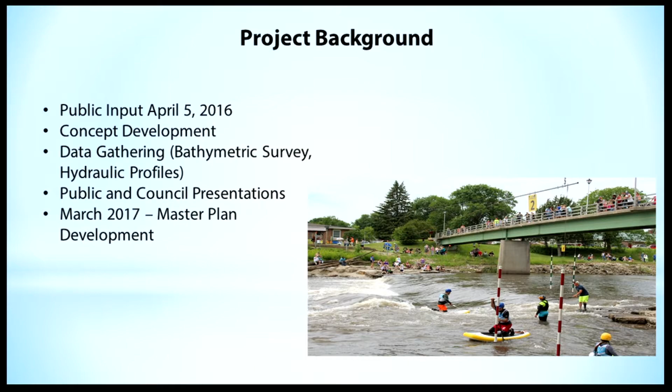Starting with project background, we began this project back in the winter or spring of 2016, starting with a public input meeting in April. That idea was gathering comments from the public. We took those comments and came back to City Council for another public meeting down at the Community Center in June of 2016, followed by a council presentation in July of 2016. We worked out some of those ideas and came back to council about a year ago to develop a master plan for that river corridor.

In the meantime, we had some data gathering. The consultant looked at some bathymetric surveys, which survey the riverbed through this corridor from Center Street down to West First Street. They did some profiling and looked at some hydraulics and river flows through that area.

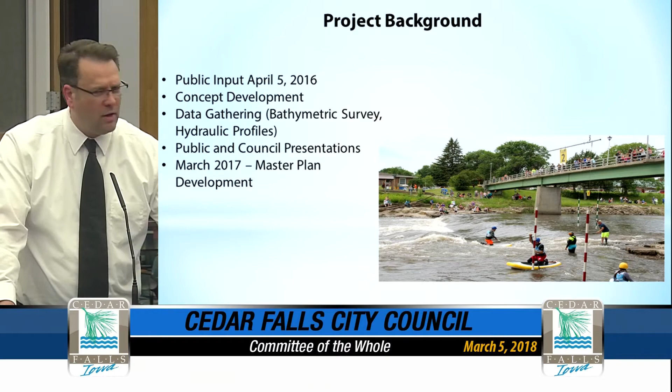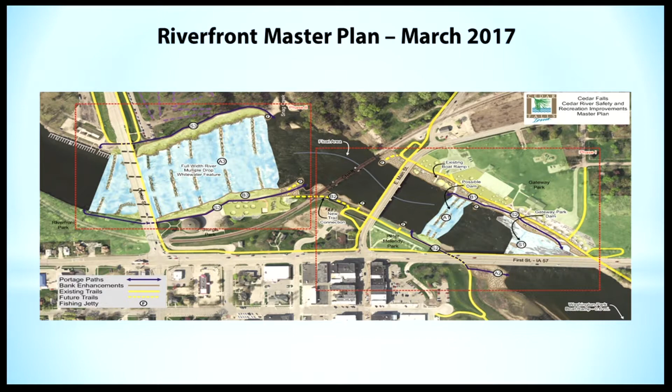So again, in March of 2017, we came back to the council for the master plan development idea. The master plan, shown in the drawing here, has an upstream phase from basically the beach house down to the river or railroad bridge, and a downstream phase from roughly the upstream side of the Main Street Bridge to the downstream side of the West First Street Bridge. In that phase, we focused on a couple of projects or concepts on the riverbank and in-river activities.

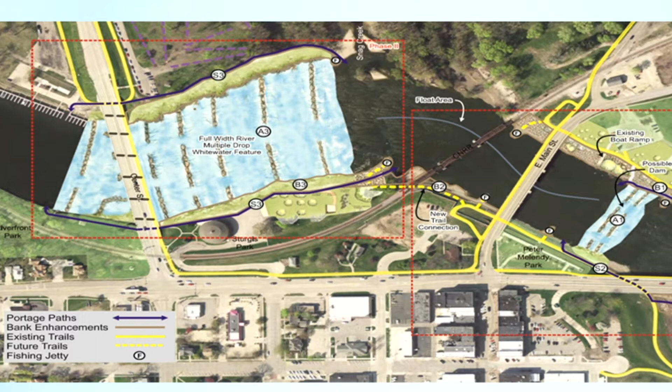So with that, I want to move this to Shane with Riverwise, and he's going to go over some of those ideas and what they've developed. We entered into a contract with them last September, so they've been working on this project since then. They're here to give a little update and preview. Thank you, David.

First of all, David, thank you. Appreciate the introduction, and thank you to city staff. We're really excited to be here tonight, very honored to be part of this project. There's been a lot of excitement around this type of recreational project in your community, and we're honored to be presenting this to you guys tonight.

What we'd like to start with is our objectives and goals for this type of project. First, we're trying to reintegrate your river corridor into your community. We're trying to take this resource, which is commonly considered something dangerous, a problem, something that floods and destroys property, and turn it into an amenity for you guys.

Our main goal is to implement your vision, the vision you provided in the master plan that David just talked about. We also want to create a project that doesn't increase flooding potential. We realize flooding is a big issue here, and we know you've just gone through your levee project, so we're really sensitive to that.

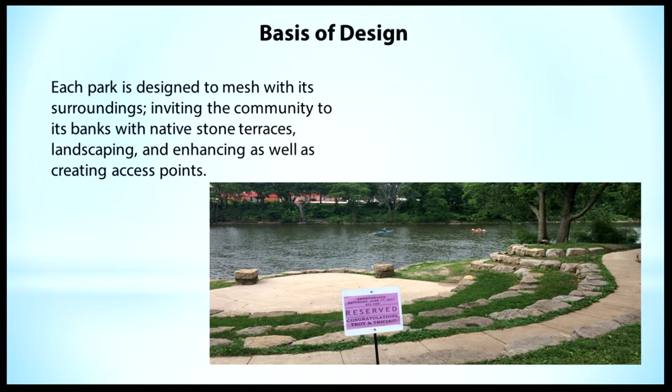Okay, the basis of our design, each park that we try to do is designed to mesh with the surroundings. So we're trying to invite people to the banks. We try to create native stone terraces that look really similar to what you naturally find on the banks of rivers. We try to create landscaping, and we try to enhance as well as create access points. Once again, let's bring people down to the river and use this amenity.

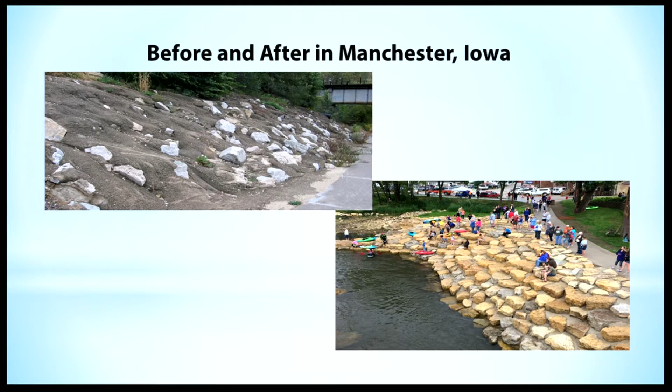One of the key things you'll notice in that bottom right picture is, well, we're not seeing the whole river there, but there's a few kayaks there. And there's a lot of people there. So one thing that's key is some people go, well, you're building these parks for kayakers. The reality, which we're going to get into a little later, is that these parks are for communities, and kayakers are just a small piece of the users that we see.

Get rid of all that stuff, pull it out, put in some natural terracing, try to integrate those outlets into the banks, and once again, take an area that's basically full of blight and create an amenity for you.

Multiple user groups. So I'm going to get into this a little more later, but one thing we really want to drive home is that these are not just parks for kayakers. Kayakers, I kind of say, are the monkeys, or they're the show that's out there sometimes. But the reality is these parks are commonly used and often used by fishermen.

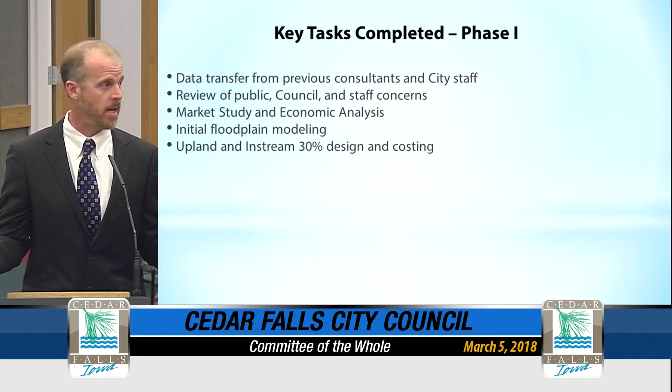That being said, we understand that no-rise is a condition that we have to have on this project. Alongside that, we did upland and in-stream 30% design and costing, which we're going to present to you guys tonight and walk you through also. So those are the key tasks that we went through.

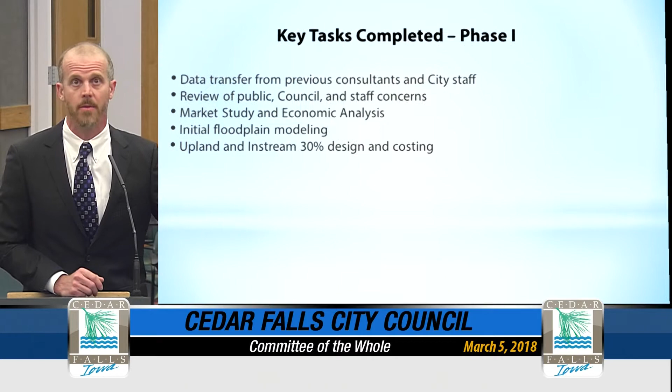So I always want to dispel the myth that, oh, you're trying to build this little park and it's just for kayakers. The reality is that's not the case. We didn't realize this till about 5 years ago when there was a study done by a lady out of the University of California, Berkeley for her PhD, where she basically came to parks around the country and sat there and watched and took notes and collected surveys from the visitors, and she came up with this number for us.

And we had been designing them with the idea that we needed to have banks and bank improvements as a big part of it, but it really drove it home finally when we got these studies. So something we want to convey to you guys and make sure everybody understands.

Next, I'm going to talk a little bit about the economic study that was done by RPI. Once again, feel free to interrupt as needed. They completed a study. It's about 50 pages. Basically, what they did was they collected data from local sources and national sources, statistics for use, different types of use, number of people, census data, to get a feel for the number of people, the kinds of people, and who's going to come out there and what they're going to spend.

We're going to summarize some of those numbers for you today. If we need to get a little deeper into that, we'd be happy to answer questions and/or can potentially follow up with you later. Specifically, there's about 3.8 million people within a 3-hour drive of Cedar Falls. Similar whitewater parks around the country, they found, attract somewhere between 23,500 and about 47,000 annual uses.

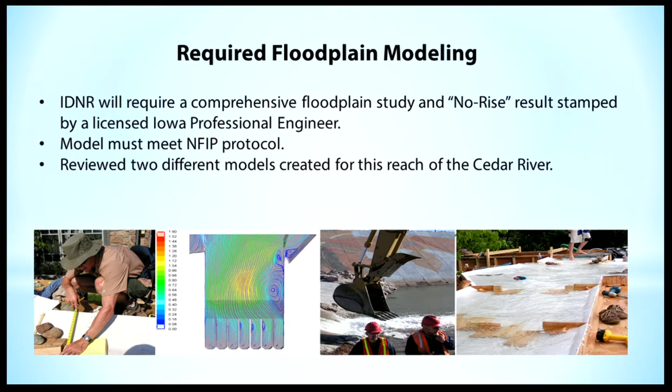To get through the first stages, we reviewed two different models created for this reach of the Cedar River. One was created by AECOM, who is doing your levee project, so we got the model from them. We also got the historic model created by FEMA for the area, and spent a lot of time working through those two models to figure out what we could do.

We had to bring them into contemporary, industry-leading software. We updated them with the current bathymetry collected earlier in the project, making sure we followed these really strict standards that the government requires. We used bridge and levee geometry in the state-of-the-art model to run these routines, and added additional cross-sections based on the bathymetry and where we thought we'd put these structures.

The result is that we've got a model that mimics the existing hydraulic conditions in this reach of the Cedar River. That right there is a big step - just to get to the point where we have a model we believe meets government standards, so we can start testing what we want to do out there.

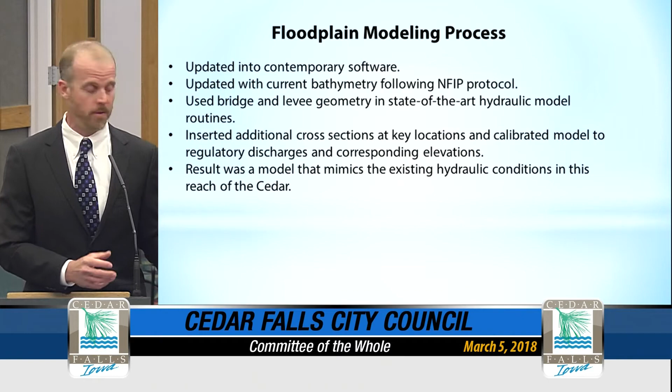So the initial concept - and this is common in rivers - was that if you want to lower the floodplain, you need to open up the river. You need to cut material away and let the water spread out. We started doing that and created an entire design based on that concept: we're going to open up the river, let the river breathe, as it were, a little bit more.

What we found was that didn't work. There's a hydraulic condition, basically from the First Street Bridge, that creates the opposite situation. The First Street Bridge constricts the river during flooding situations and can actually raise the water surface. So what we had to do was switch that. You can see up here, we actually caused a rise of 0.3 feet - we're talking about 4 inches. That's enough, as we all know, to cause a rise.

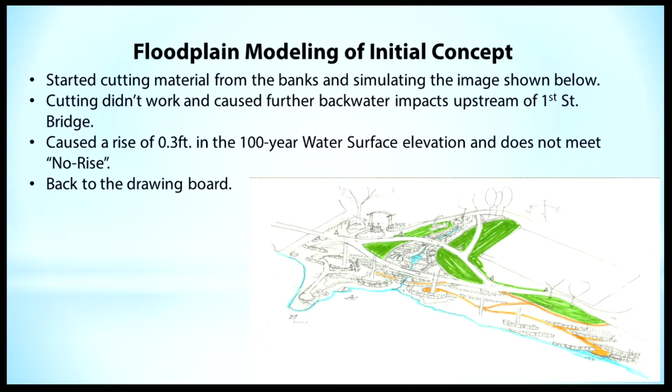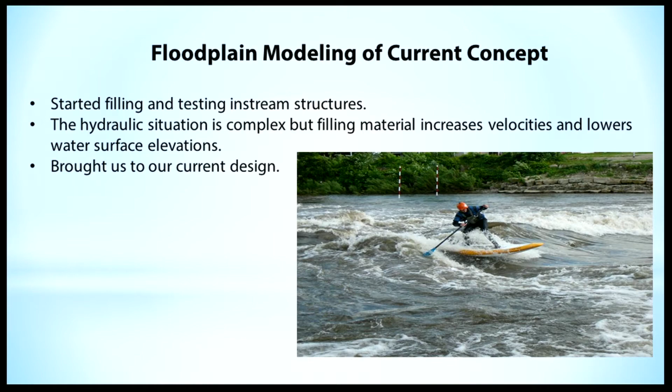It's a non-starter on this project, so we had to go right back to the drawing board and try the opposite - adding some fill material, which constricts the river, speeds up the velocity, and drops the water surface. A little bit of technical engineering design there, but the reality is we went through a whole process we thought was going to work. It didn't, so we came right back to the drawing board, switched our process, and now we think we've got it working right.

This is what you want to flush out at this stage of design, because we're still drawing renderings - we're not deep into the drawings yet, and we haven't submitted permit applications to the government. It's easy to change things at this point, so we feel good that we found this problem before we got too far.

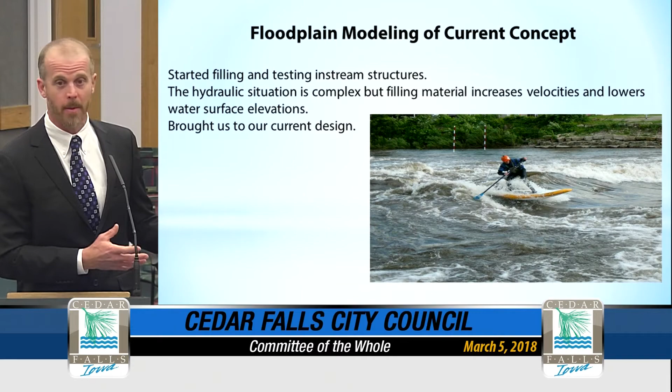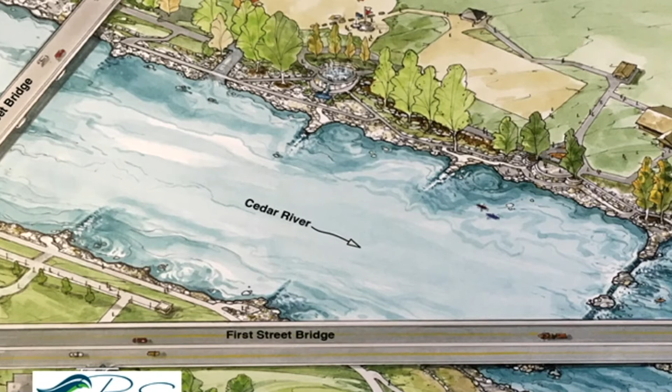We basically have 8 features proposed here. The first one starts up near the Main Street Bridge on the north side of the river. Just downstream of the bridge, you can see some rocks in the river, a small feature with a trail that comes down to it. This is what we call the put-in, or place to start, for those wishing to have an in-river experience. They can come down just downstream of the bridge, pop in right next to that structure, and move on down through the river. There will be 4 different features on that side of the river that they can experience.

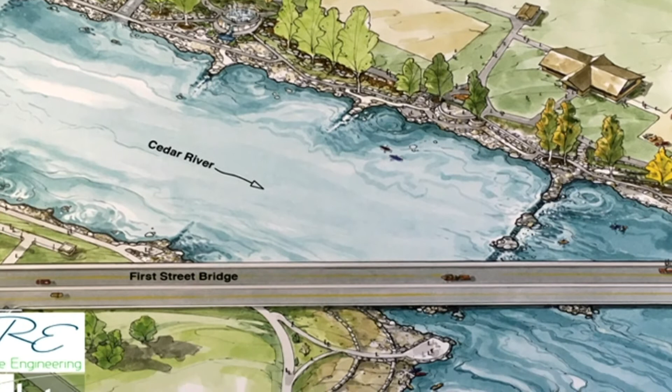We plan to create those features so that they operate at different water discharges. So no matter what the discharge, whether it's super low or medium, people can still come out there and have a recreational experience. At high flows, all of these features will be inundated and basically disappear, and the river will look more or less like you'd see it now at a high flow. On the same hand, there won't be any recreational value there at that point. We also think that's going to help keep people from getting in the river when the water's too high.

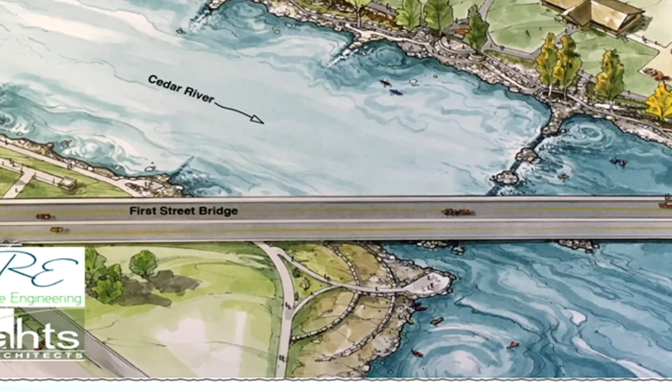On the south side of the river, we have very similar features, just not as many, because it's basically a shorter reach. The idea is that people could come over from the Main Street side, cross over the First Street area, and be able to get into the river and have an experience on the south side of the river too. So we want amenities on both the north side and the south side. The picture is centered now over the 2 different features we show there, and you can see there are trails that come down to both, allowing people to get in and out of the river.

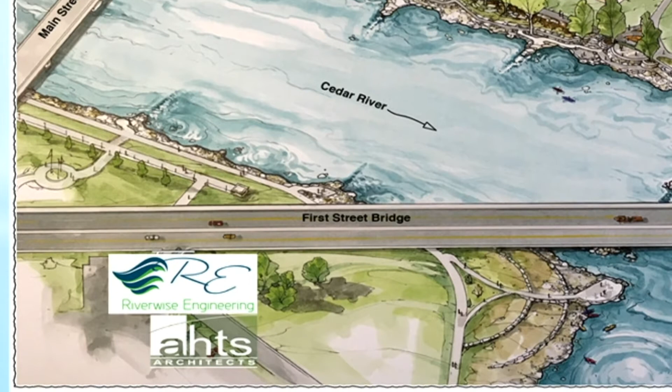Moving down now to the clay hole area on the north side of the First Street Bridge. This is the existing feature that's out there and has kind of been the impetus for this whole project. There's an existing whitewater feature that shows up as a result of the remnants of an old concrete dam, and we want to enhance that, short story.

We believe that's going to be one of the key focal points for people who actually get in the river and want to recreate—the kayakers, the tubers, and whatnot. We believe we can build either 2 or 3 whitewater features there. You can see we've got some little islands that split these features, and the idea is to create differing levels of skill as you move out towards the middle of the river. So the more timid people can stay close to the banks, going through the chute closest to the bank, making it easier for them to get right back out. The more aggressive or more skilled people who can actually paddle a watercraft out there can experience the feature that's more towards the middle of the river. So it's designed to cater to people's different skill levels based on where they are.

Just downstream of the First Street Bridge, we envision one more feature and a nice area for people to exit the river. There's a concrete trail that comes right down to the river, and a big swirling eddy there that will suck people in and help them get out of the river.

Any questions about the in-stream portion before I pass this off to Larry and let him tell you about the bank work?

One question: is everything here real rock, or are you going to do fabricated rock to make these things?

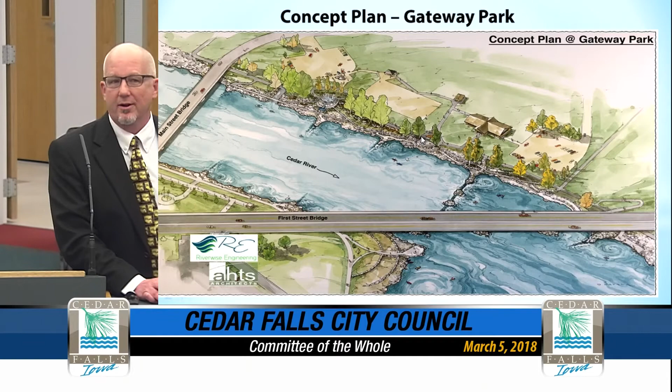So we've got an upper patio that's an overlook. Again, three out of four users are going to be on the shore, so we want to accommodate them and get them a chance to come down to the river. We developed these two patios, one here at the top, and one further upstream, where we have 5% fall walkways that go down to the river, accessing them from both locations.

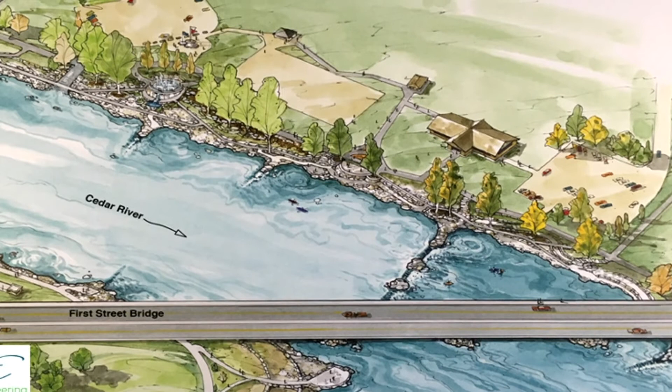Under 5% is handicap accessible, so we don't have to use handrails or formal steps. You'll be able to walk gentle paths down to the river's edge and get to any of the features you want.

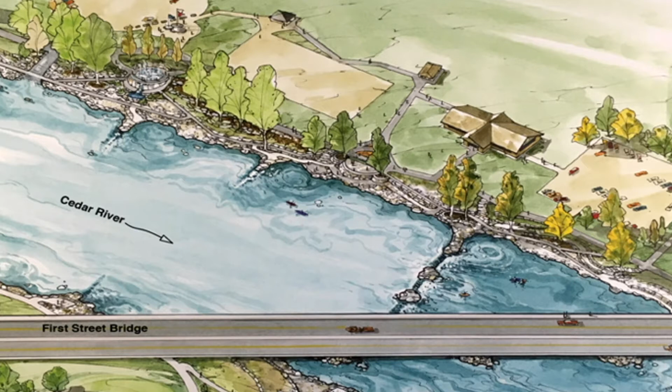We have kind of a high road, low road philosophy. We try to keep a path down at the shoreline consistently so that when tubers come down, they can just run right back up—it's like a sled run in the summer for them. But the ramps are basically for the casual visitor too, and to go to the bathroom.

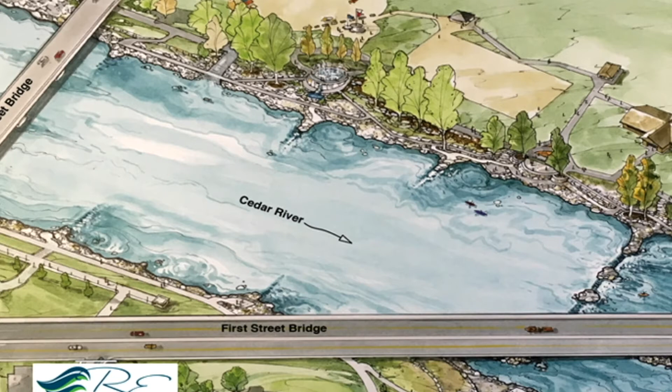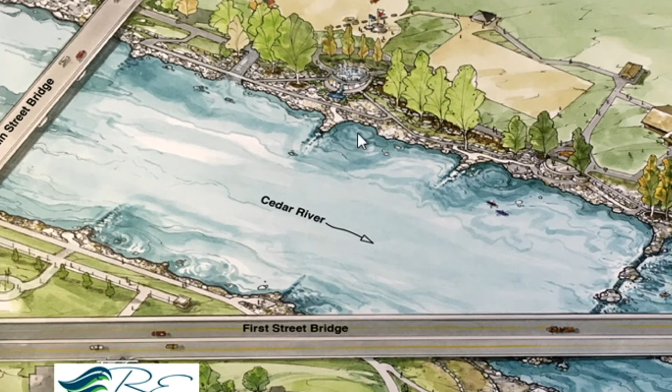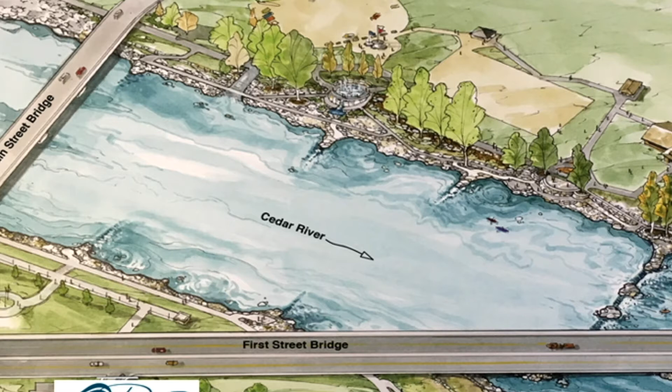Possibly with a splash park, and we do intend to use lighting in the trees. We have that in the budget to light down onto the whitewater features and fountain areas so that we get a little bit of dancing light feature, because the park is very visual and you're going to be seeing it for most of the year. So when it's not summer, we still have light and some things going on that are pretty lively and neat to look at from the other side of the river.

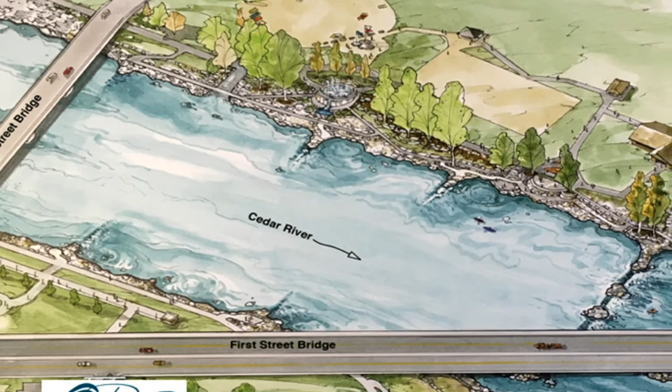We did put in the budget kind of a blank item because we think the park would benefit at the parking lot entry from some kind of an entry feature, since it is Gateway Park. That's kind of where, in our past projects, we've involved an artist or an artist group to create something special there at that entrance. So we left that door open to collaborate with them.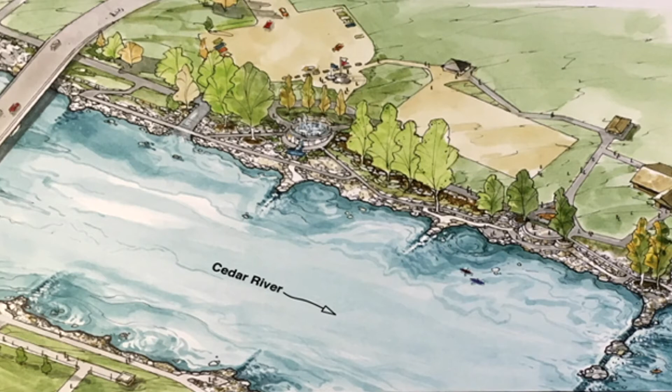We have talked to geologists and started a program where we do some educational signage along the river describing the geology, the hydrology of rivers, and the riparian vegetation. So we do some educational things there, and we've got that in the budget too.

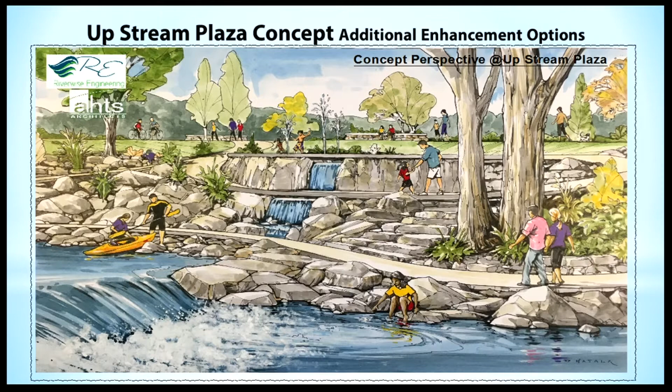I'm just going to move on to the next picture. Our concept for that is something like this at the upstream plaza, where we would incorporate water, an entry point, and use lighting effects on the whitewater to create this dancing light effect. We think it would be a really popular spot.

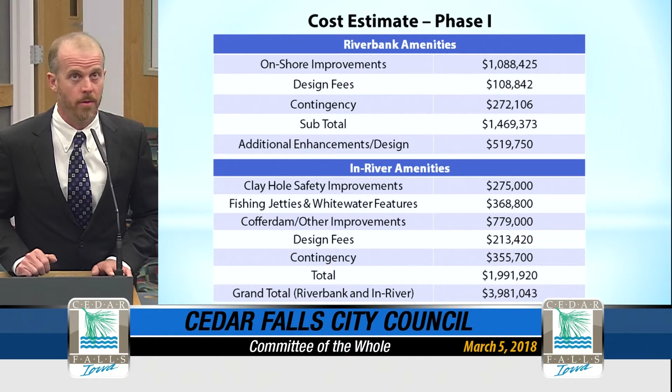Moving down to the in-river amenities—I think Dave was asking about the clay hole safety improvement specifically. We've got $275,000 earmarked just for that area: cleaning it up, getting rid of concrete, and shaping the area to make sure we keep an amenity. Fishing jetties and the whitewater features, $370,000. Coffer dams and other improvements, about $800,000. Design fees, $200,000. Contingency, $355,000, for a total of about $1.9 million. The grand total, adding riverbank amenities and in-river amenities, should be about $3.9 million.

There's our costs—any questions on that? We can come back to this too if we need to. A couple questions actually from the last couple of slides, if that's okay. Sure. On the patio sections here?

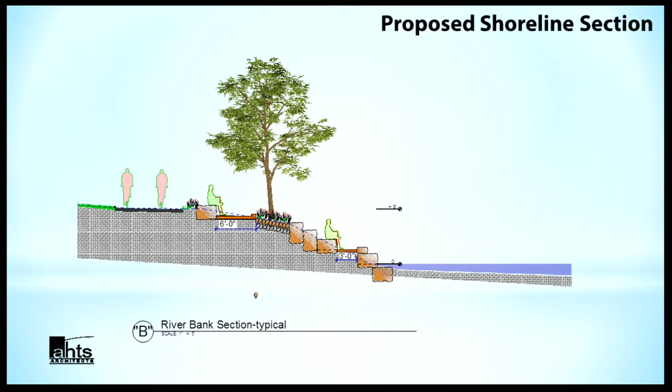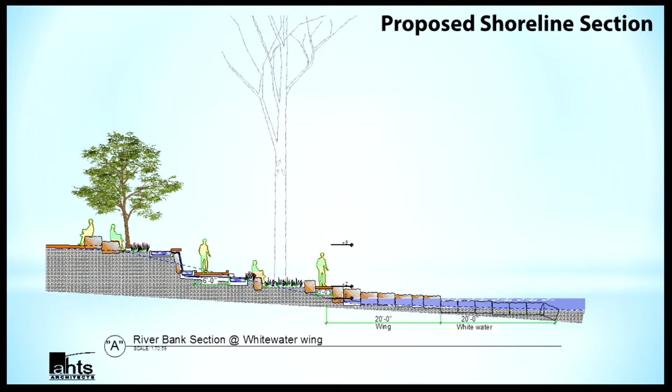Yeah, the patios you mentioned—what are the materials like for those, and how do they fare in the winter? Well, we have concrete patios for the most part. We've got a price in there for concrete patios, but it's a pretty high price so we can do stamped and colored concrete if you like. If it changes to something like a splash pad, that's going to be quite a bit different in outlay of money—there was the $300,000 I think you showed.

So what kind of annual maintenance costs would we be looking at then? Well, it's typically going to be what any other normal concrete paving is. We plan to protect the ends from undermining by flood water, but everything's going to be flooded regularly there. The natural stone really does hold up really well, and it's shown to do so since we did the project in Charles City. So I'd say it holds up really well.

Okay, and then you mentioned some tree removal—do you have any idea how many we'd be talking about? Well, we're going to try to save the big trees that we have there. I don't think we have any trees destined to be removed unless the city desires to do that. Okay, thank you.

On your riverfront master plan as of March 2017, there are 5 drops below the dam—that's not included in this. This is from East Main downstream, correct? Correct. So that's phase 2. We're working on phase 1 right now, which is just that lower area. Okay, so that hasn't been included yet.

Are you going to have an estimate today on phase 2? Do you want to answer that, Dan? Yeah, their contract was just focusing on the downstream section, from Main Street down to the First Street Bridge.

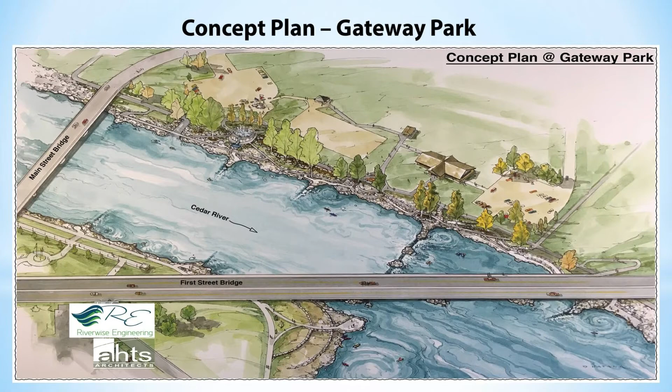Have any of these other projects experienced floods? And can you talk to what some of the mitigation is, or ways to keep it from being damaged by the flood? All of them have experienced floods of different magnitudes.

There was a flood, I don't know if any of you heard, but in Lyons, Colorado, about 2 years ago, some people called it a 1,000-year flood that went right through a whitewater park built in the early 2000s, and many of the structures just disappeared, never to be found again. Much smaller river, different situation, but some people called it a 1,000-year flood.

So that's a possibility on any river. The river will always win in the long run, so I don't want to deceive you and say this is going to be out there for 100 years. We have some parks that have been in operation over 30 years at this point and still functioning effectively without problems.

That being said, I also include in our budget 5% first-year maintenance, because what we find is once we build these parks, we can usually go through one big hydrograph or one decent annual flood and get a good feel for places where we're either going to have erosion, or sediment buildup, or places that are going to create problems.

So right from the start, we want to set aside that budget so that we can come in after that first hydrograph and make those tweaks, as we usually call them, to make sure those structures are functioning for the long term. But that being said, everything's built with concrete, large rocks, and grout. Those are the three primary materials we're using to anchor the river and these structures.

Yep, Mr. Sturge should come up next. I think we have a recommendation. Yeah, I just want to kind of wrap this up. Appreciate your comments. Very good here. But basically with this project, they're going to kind of finish out this stage of the contract. And we want to move ahead with the endorsement from the City Council as this is presented, and then finish this out, then go into permitting and start developing.

We want to recommend them to go into a supplemental contract to start the development of a final design, and keep this project moving forward. Our idea is to do some public outreach later this year and into next year, just to keep it moving forward. Getting out and talking to service clubs and trying to find some champions out there, and maybe doing some fundraising for some of those additional elements that were identified, like more in the upland reaches of

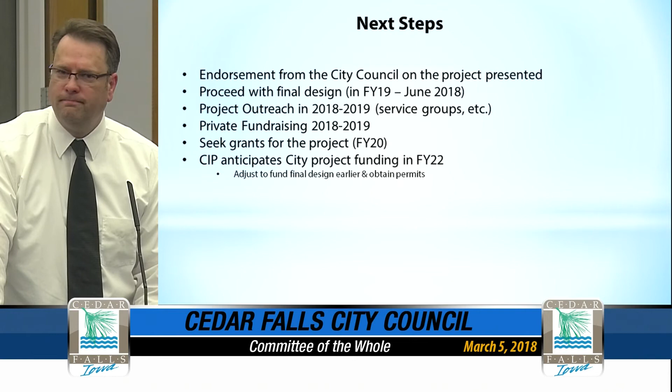the project. And then once we get through the final design, we have a real hard number, a real good idea what this is, and we can go look for grants out there to help fund this project, and then get ready for construction in FY22. Thank you, David. Open it up for discussion for council, or looking for a recommendation?

So what are the additional costs that you would be incurring before you start seeking the funding? Well, the cost would be to move it into the final design, and those numbers that you saw did include final design. So it'd basically be another supplemental contract with Riverwise to take these design ideas and move into more of the engineering side of it, and working with the DNR, the Army Corps, to make sure we can get permitting going for these two.

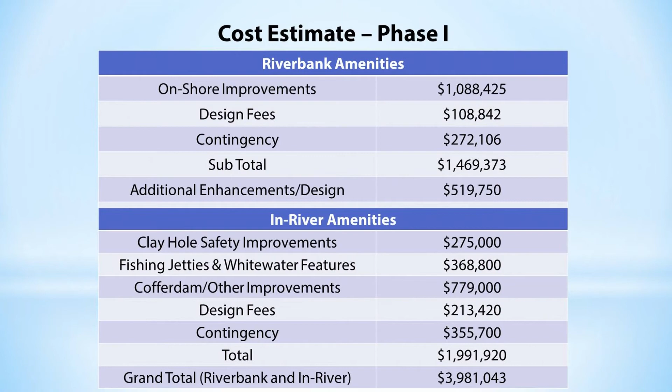And are we aware of any grants or fundraising that's been done? Oh, we can look at CAT, we can look at gaming. There's some grants out there. DNR's got some grants. The consultant can surely help us look for some ideas and some monies out there. Mr. Blanford, sorry. Shane, in your opinion, do you expect that we would not have any issues with DNR approval?

I don't anticipate any deal-killing issues with the DNR, but we'll go through a number of different sub-agencies within the DNR. They always have comments, questions, and concerns. They always do. If they didn't, they wouldn't be doing their job. So we expect that. That's part of it. The short story is we believe this is a permittable project.

Thank you. Mr. Wieland? Are you looking for a motion to accept? Yeah, that'd be great. Want to formalize it? Yep. A motion from Mr. Wieland to accept the next steps. Second. And a second. Any further discussion from council, just in general? I do have a question.

The funding for this, a fair amount of this, I think $1 million was going to need to be privately fundraised. Blackhawk Gaming was another portion of that, I believe. Flood reserve funding. I'm curious about the Blackhawk Gaming side of that. I know we regularly visit with those folks looking for funds. Should the private fundraising happen at a faster pace on this, I assume it's much the same as any other project where, say, in no time we come up with $1 million, we start to adjust the schedule as far as what we're asking for from gaming and the other pieces of the puzzle here?